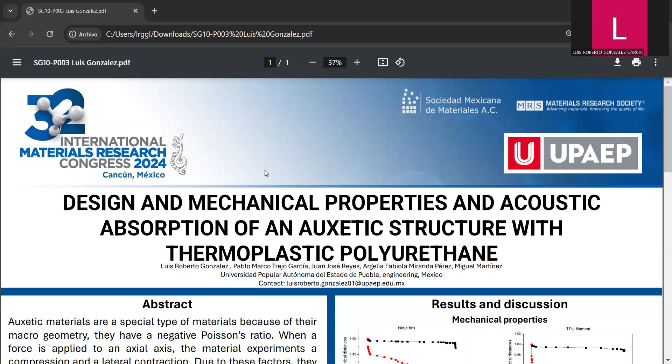Modeling different materials according to this classification to obtain a negative Poisson ratio improves many properties such as greater resistance to plane strain fracture, greater shear modulus, indentation resistance, fracture toughness, or energy absorption. Particularly in sound, auxetic materials have attractive acoustic properties at low frequencies, and auxetic forms of polymeric and metallic foams have improved acoustic absorption compared to conventional materials.

This work aims to design a chiral auxetic structure printed in thermoplastic polyurethane and measure its sound insulation capacity inside an impedance tube. The structure is a cube with a height, width, and depth of 64, 54, and 45 millimeters. The thickness of the entire structure is 1 millimeter.

The geometric pattern is classified as chiral and consists of inclined squares with circles in their corners. On the side, it has a pattern of overlapping empty squares. Two designs were printed on an Ultimaker 3D printer, one with a TPU elastomer and another in TPU NinjaFlex.

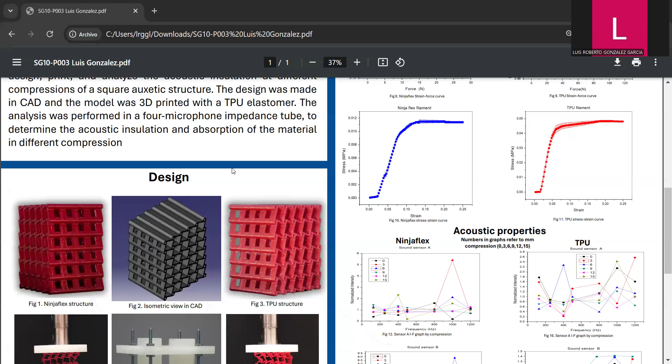The first part of the study consisted of measuring the deformation of the material. It was placed in a universal tension machine and it was compressed to 15 millimeters. The results are shown in the following four graphs. The experiment was repeated several times to verify that very similar data were obtained, which ensured the determinate characteristics of the material.

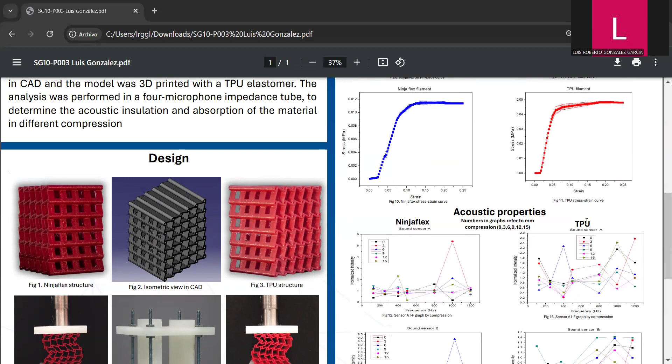First, we have these two strain-force curves, normalized to the average of the vertical and horizontal distance. The curves decrease because the y-axis is compressed downwards and the x-axis is compressed inwards. The NinjaFlex structure has a Poisson ratio of minus 0.094 and the TPU structure has a Poisson ratio of minus 0.12.

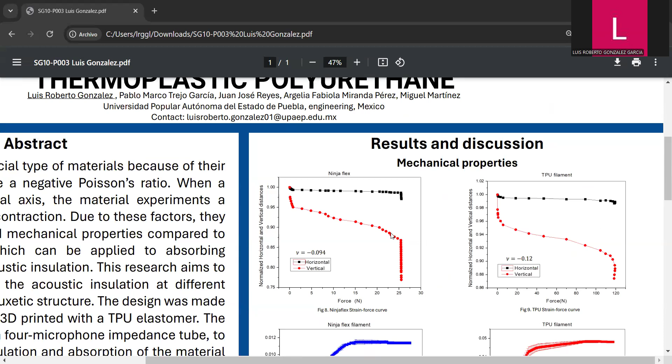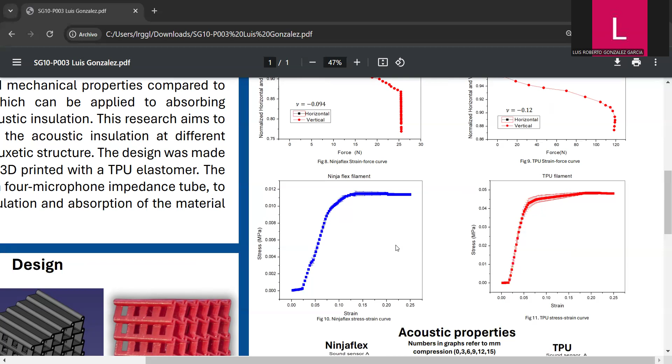Then we have the stress-strain graphs. For the NinjaFlex structures, 25 newtons were required, and for the TPU structure, 120 newtons were required to compress the 15 millimeters. In this interval, both show elastic behavior that reaches their yield point.

The second part consisted of measuring the acoustic insulation of the materials. An impedance tube was designed with 4 sound intensity sensors purchased from Pasco, based on other similar works, and the ISO 10534 standard, which indicates the basic requirements in the material and dimension of length, the diameter of the tube, the size of the speaker, and the distance of the microphones to the sample to be studied.

The tube was made of 160 millimeter diameter PVC tube, lined inside with foam to attenuate outside noise. According to the tube diameter, a range of study frequencies was determined from 20 to 1250 Hz. And with this, the positions of the sensors were determined.

Two sensors were placed between the sound source and the sample, one pointing towards the speaker and another to the sample. The other two sensors were placed behind the sample, one pointing to the sample and the other pointing at the end of the tube. They were classified as A, B, C, and D, with D being the sensor closest to the speaker. The end of the tube was anechoic, filled with foam to dissipate the generated waves.

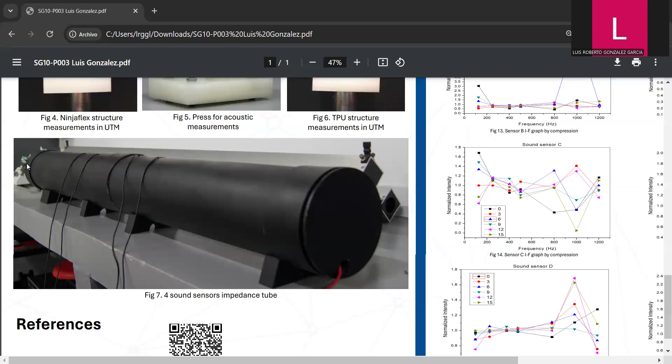The fast Fourier transform function was used to collect data, which decomposes the received sound into the corresponding frequency and shows the intensity captured in volts. The results are reported in the following intensity frequency graphs, indicating the data collected by each of the four sensors. The different curves shown refer to each change in compression: 0, 3, 6, 9, 12, and 15.

There is a change in intensity detected by each sensor as the samples were compressed. However, a more in-depth analysis is still needed in that part, but at least a similar behavior has been observed, only changing the frequency for each compression used. In addition, for future measurements, the response based on the orientation of the windows within the material and the buckling needs to be analyzed.